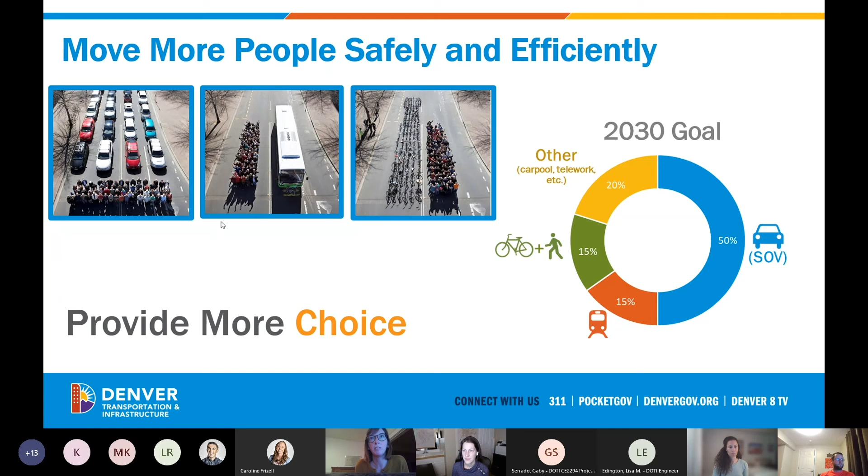On the next slide, we'll speak to these 2030 goals. Those are part of the Denver Mobility Action Plan. This plan really sets very strong goals in terms of what our mode share should be as we continue to move forward and think about how we can use space within the city's right-of-way more efficiently to continue to move people safely throughout the city. We'll also keep in mind sustainability and how we can continue in Denver to not only move people around the city, but do so in a more efficient and sustainable way.

One other aspect of the Mobility Action Plan is part of the Vision Zero cities. Denver is a Vision Zero city, which means that we aim to have zero traffic deaths by 2030. That goal is closely aligned with the mode share goal in terms of shifting choice and offering more mobility choice for folks, whether you want to walk, bike, or drive, regardless of how you're choosing to get around Denver. How can we offer more choices and make those choices safer as we continue to move forward as a city?

On the next slide, I wanted to talk through a bit more of that safety element. We're looking at how we can not only increase the mode shift of people walking and biking, but also decrease crashes and design out some of those opportunities for conflicts on our streets as we continue to improve multimodal safety throughout the city. Again, as a Vision Zero city, this is paramount to our work. It is part of the foundation of every project.

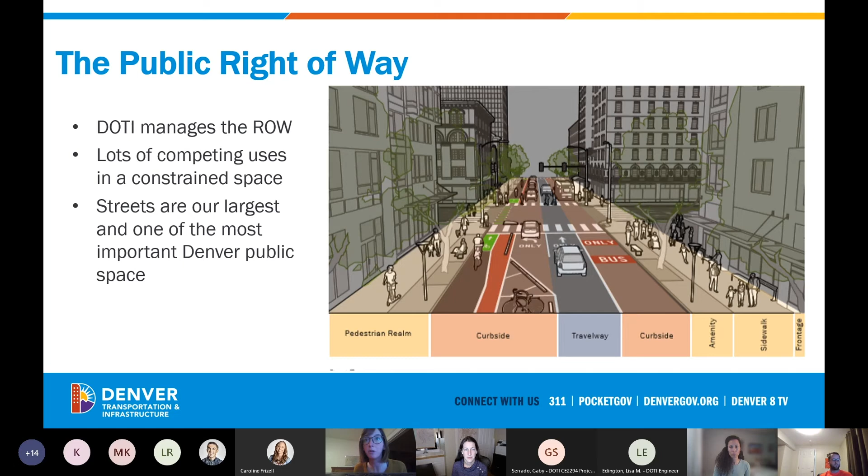As DOTI continues to create more multimodal choice within the city, we are constantly looking at this constrained resource that we have within our right-of-way and how we can continue to understand how we can parse that out, really delineate the space so that regardless of how you're using our right-of-way and how you're choosing to get around Denver, you feel safe and comfortable doing so. And with that, I will hand it off to Afwar to speak more about the University Neighborhood Safer Streets project.

All right, thanks, Ellen. That's a good overview and a good reminder as to why we're doing a lot of the work that we're doing. Thinking about that right-of-way too, I think the University Safer Streets is a good example of how we're going to try to manage that strategically, with our partners, and in a collaborative way. So let's dive into some of the projects at hand here briefly tonight.

There's a lot of plans that some of you are familiar with that have been identified to help identify the projects in the area. So some of these plans, Denver Moves Pedestrian and Trails, Denver Moves Transit, and the University Mobility Plan and Study - these plans are really community driven. We've gotten a lot of feedback from folks around what kind of actions we need to prioritize to strengthen connections and improve safety and the ability to get around the University and Colorado Station areas. So these plans have identified projects, but we need the funding to make them happen.

We have a couple funding opportunities available to us now: the CIP, which is the Capital Improvement Program, and the Elevate Denver bond program. With that funding, we're able to move some of these projects forward that have been identified through community and through these plans. This grouping of all the projects in this area will be labeled under University Neighborhood Safer Streets.

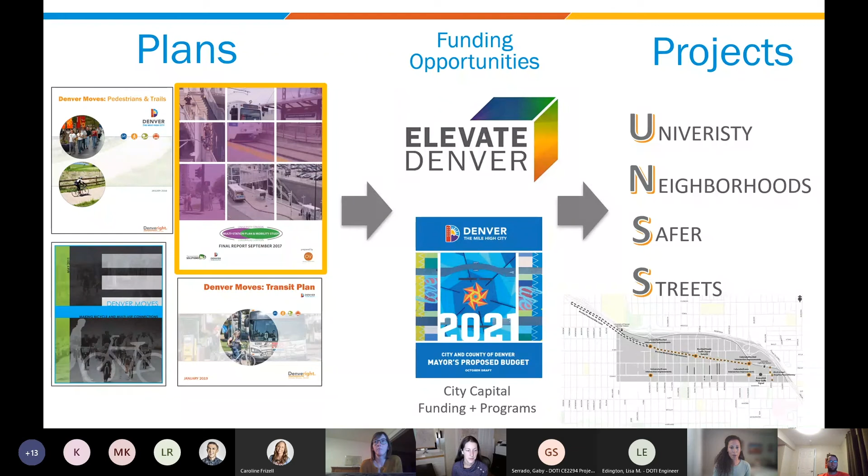These projects are identified for multimodal improvements in this area, which you can kind of see down here on this map. We'll go to the next slide and zoom in on that map to get a better sense of where we're at in this area.

As you can see here, this University Safer Streets area is bordered by I-25 on the north and east, Williams on the west, and Evans to the south. The projects we're looking at encompassing in this University Safer Streets area are identified to be implemented in the next 5 to 7 years.

That's a long time, but we've got some work coming up a little bit more immediately this spring, summer, and fall. That's really what we're looking to talk with you about tonight - that's what's driving this meeting and wanting to make sure we're getting out and talking with you about some of these more immediate projects.

If we go to the next slide, we can see that one of the projects here is the Buchtel bike improvement, which Ellen will be diving into a little bit later tonight. That's one of the projects really driving this conversation this evening, and we'll dive into that a little bit more.

Just real quick, on the next slide I wanted to highlight several of the intersection improvements. There's going to be some major intersection improvements in this area that I'm sure many of you are familiar with - they've been identified with community support. Those intersections, as you can see here, are Buchtel and University, Buchtel and Colorado, Evans and University, and Evans and Colorado.

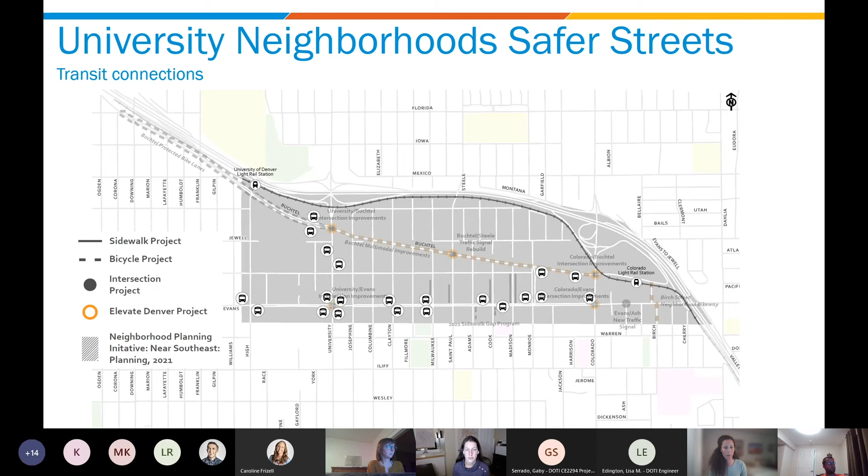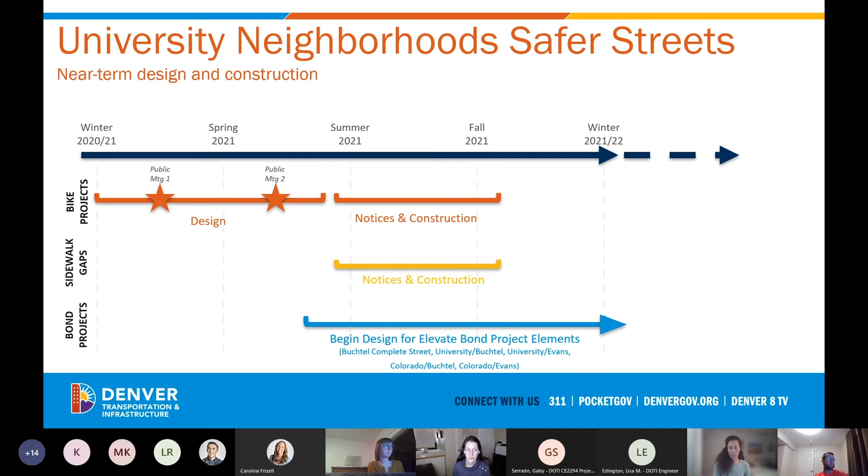I think maybe a schedule is up next, and then we'll dive into the Q&A break. Just a real brief highlight of what you can expect: we have the bike project, which Ellen will dive into after the break, with construction and implementation this summer to fall, and more opportunities for public input. Compare that to the sidewalk gaps, which will also be filled this summer and fall, and the design elements for the intersection improvements. That gives you a good idea of what to expect in this area in the immediate future. After this break, we'll kick it over to Ellen.

All right, so we have our first Q&A session here. We have at least a few questions in the chat so far, and I think the first one was from Nick, about the breadth or scope of this project, focusing on bike lanes. Ellen hasn't gotten into that discussion yet, but maybe you can do a quick description of which section we're talking about and why we're talking about it today.

Thanks, Alicia, and thanks, Nick, that's a great question. I know there's a lot of information we just threw at you, but it's worth noting the University Neighborhood Safer Streets Initiative is a collection of projects that are much more than just bikeways. Part of why we're having this meeting tonight is that there's a bikeway project as part of the city's paving coordination program. This is an effort on Denver's part to be more efficient with resources and to disrupt the streets with construction and improvements as little as possible. So we're looking at our repaving program within the city and identifying areas that are going to be repaved and are also identified as bikeway connections in Denver Moves Bicycles.

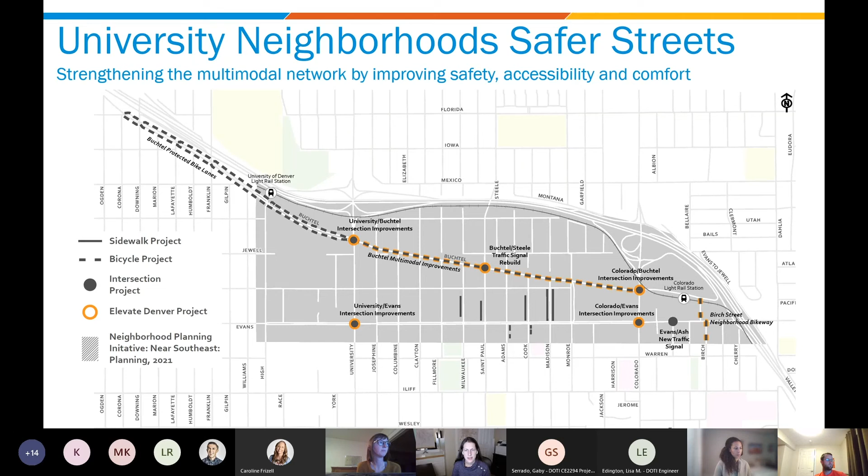I'm going to turn it over to Ellen here to talk about the western portion of the bike project. Great, thanks, Alicia.

As I just mentioned, this part of the meeting we're really going to focus in and drill down on the bikeway improvements proposed for Buchtel Boulevard from Corona Street to University Boulevard. This is part of our paving coordination program. On the next slide, we'll speak a little bit to how DOTI considers bikeway improvements as we continue to build out the network in our city.

In 2018, we did a statistically relevant survey of Denverites to understand comfort levels with the current infrastructure and bikeway network throughout the city. What we found from that survey is pretty interesting: only 16% of people feel confident or somewhat confident on the current infrastructure available to them and the current network connections available.

On the next slide, what we gleaned from this survey is that there's a large percentage of Denverites, 75% in total, that would potentially ride a bike in Denver much more often if they felt more comfortable doing so. So we are really looking at how we can continue to build out the network through our multiple implementation programs and opportunities to create a strong, connected network of safe, comfortable, easy connections for people who are choosing to ride their bicycle.

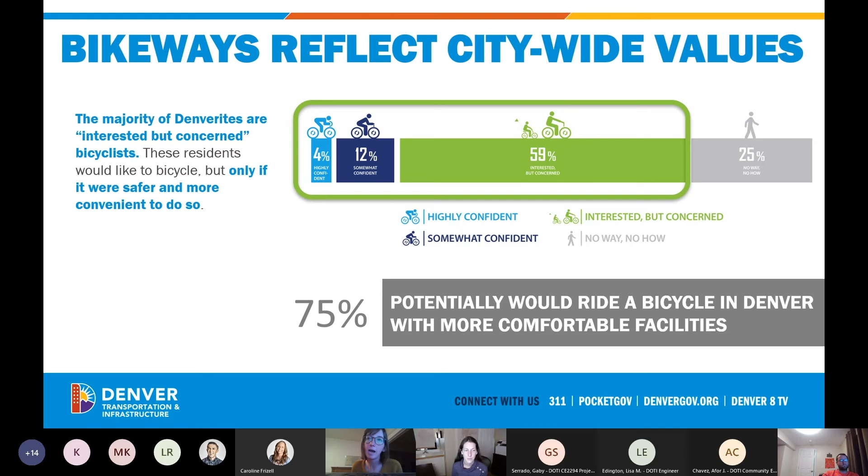The great thing about these improvements is that while safety of people riding bicycles is a top priority, there are also lots of benefits for people who are walking as well as people who are driving on those same streets. So these truly are multimodal improvements as we're building out a network of stronger connections for people who choose to bike.

Building on that, we are looking citywide at how we can increase the combined walk-bike mode share, as well as increase the amount of people who live within a quarter mile of a high comfort bikeway — that's within a 5-minute walk of a high comfort bikeway facility that can plug into a more connected network. From that, we're looking at how we can provide healthier, more affordable, and more sustainable transportation options citywide.

We have a goal over the next 5 years, through 2023, to build 125 new lane miles of bikeway facilities. This is an effort to quickly build that network so folks feel more comfortable and feel it is truly an option to get around for their daily needs in Denver.

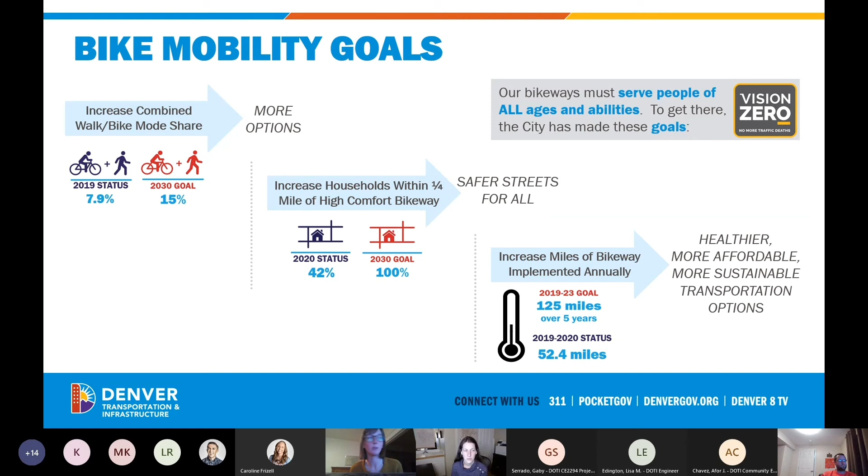As part of that, we're looking at how we can develop high comfort connections — bikeways that can serve people of all ages and abilities, and really align with that 'interested but concerned' group. So for folks with a lower comfort level overall, how can we design our streets to be more comfortable for people who are interested but maybe not currently biking on our streets?

One of the implementation programs we use to continue building a stronger, more connected network of multimodal and bikeway safety improvements is our repaving program. We partner with our operations team within DOTI to understand the repaving schedule across the city and align that with our planned network connections within Denver Moves Bikes. This represents a key opportunity to implement important connections while being mindful and efficient with our resources, so we're not continually out in the street or restriping something just repaved. It allows us to be more efficient while still making headway on our goal of stronger multimodal streets throughout the city.

Through this program, we aim each year to implement 10 or more miles of bikeways through the repaving program.

Now that we have a little bit of background about the history around the implementation program for this section of Buchtel Boulevard, let's dive in to talk about what this street looks like today, as well as what the planned improvements are through this program.

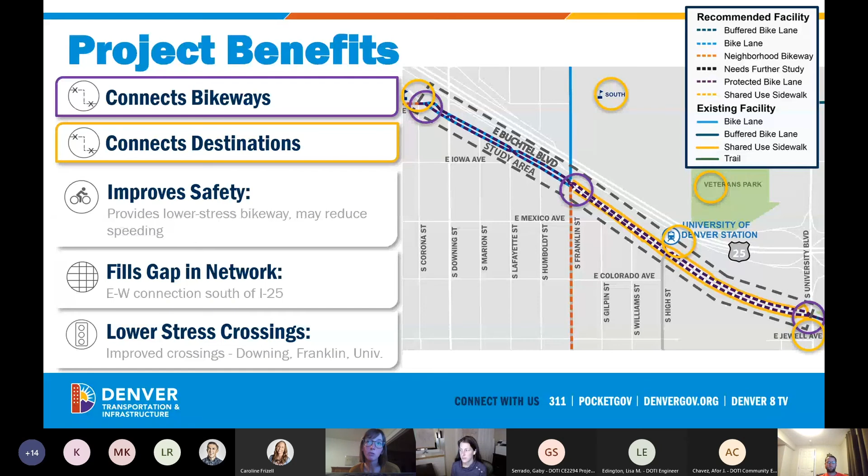Through the South Central Community Transportation Network, those bikeways on South Franklin and East Florida are moving forward. It also fills a gap in the network, providing a strong east-west connection south of I-25 that currently does not have a high comfort connection. We're also looking at how we can make crossings along Buchtel lower stress through this project, with a specific eye to Downing, Franklin, and University.

On this slide, we are looking at the existing conditions of East Buchtel from Corona to Franklin Street. As many of you are familiar with this area, the width and characteristics of the road change as you move along it. For those on the phone who can't see the slides, I'm going to briefly describe the existing conditions for different sections of Buchtel Boulevard.

This is the westernmost extent of the paving coordination project, from Corona to Franklin. There is an existing bike lane, but only from Franklin to Downing Street, so there's not a continuous connection between the existing bikeways and the proposed bikeways. There's currently no buffer or protection of this bike lane between the travel lanes on Buchtel Boulevard.

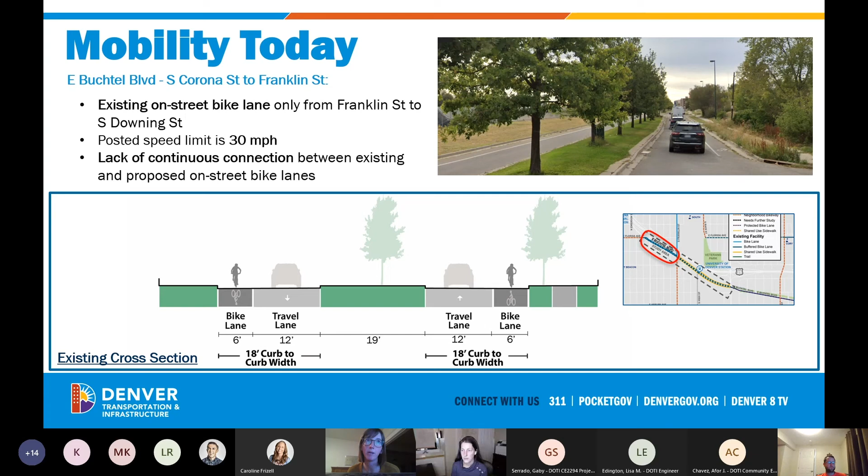Moving a bit further east, this is Buchtel Boulevard from Franklin to High Street. Currently there is no bike facility in this section, and there are very wide travel lanes, 18 to 19 feet in some cases. For context, typical travel lanes vary between 10 and 12 feet, so these are very wide lanes, and that can sometimes encourage high speeds, which can further discourage people from biking, especially since there is no bikeway in this section.

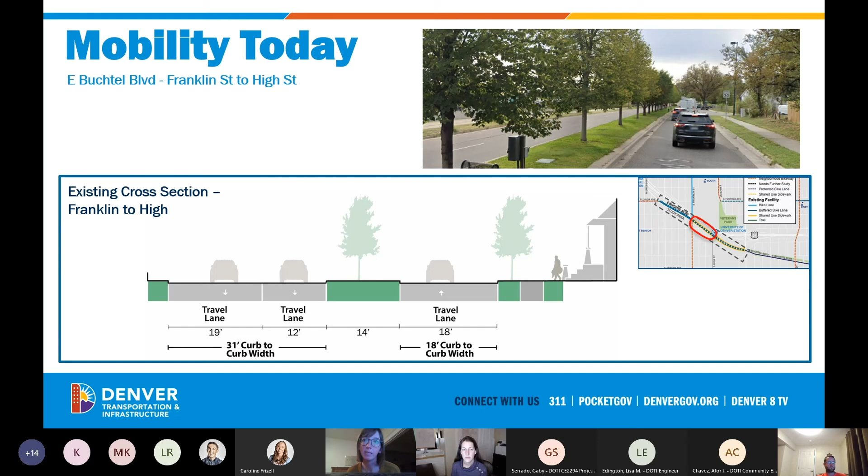On the next slide, we'll talk about the easternmost extent of this project: East Buchtel Boulevard from High Street to University Boulevard. This is the section of Buchtel that fronts DU. Currently there is a parking lane and 2 travel lanes in each direction, same width of the street, but this is more of the normal width of travel lanes, an 11-foot and a 12-foot travel lane in each direction with parking on either side of the street.

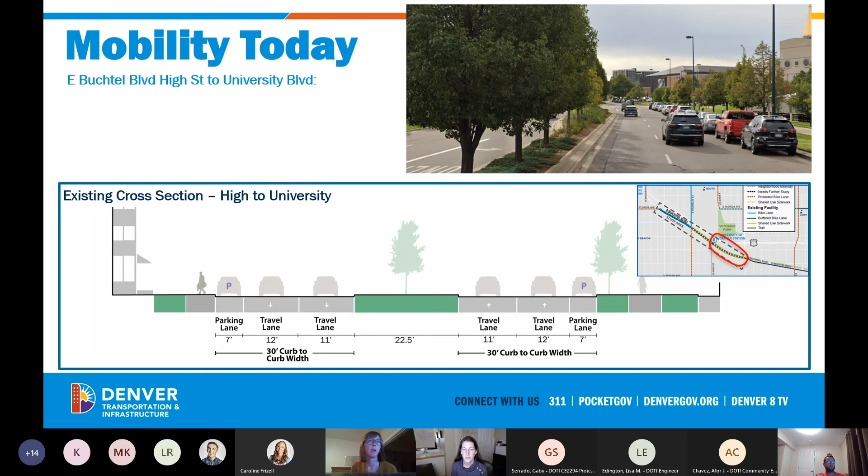Now let's talk about some more existing conditions, specifically what the crash picture looks like along the street. As I mentioned earlier, a goal of the paving coordination program is to build out a stronger, more connected network of bicycle-friendly and bicycle priority streets throughout Denver. But we're also constantly looking at safety and how we can improve safety through all of our projects and multimodal improvements. Crash data is something we look at for all projects.

If you're able to see the presentation tonight, you'll notice 2 orange dots on a picture at Buchtel and High and at Buchtel and University. This is where we've noted crashes that have involved somebody on a bicycle or someone walking. There have been 6 total of those types of crashes, looking at data from 2015 through 2020, the past 5 years. But there have been 108 crashes in total along the corridor, with 2 serious injury crashes and 1 pedestrian seriously injured along this stretch of roadway.

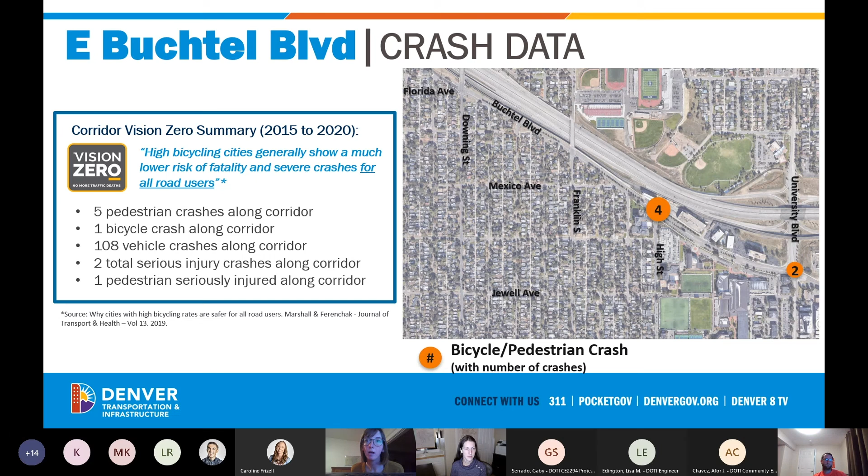We take this into account, and later in the presentation we'll talk about the proposed improvements. We really look at intersections and locations along the corridor where there have been crashes and conflicts, and how we can potentially better design the street to design out some of that error and make it safer for everyone using the road.

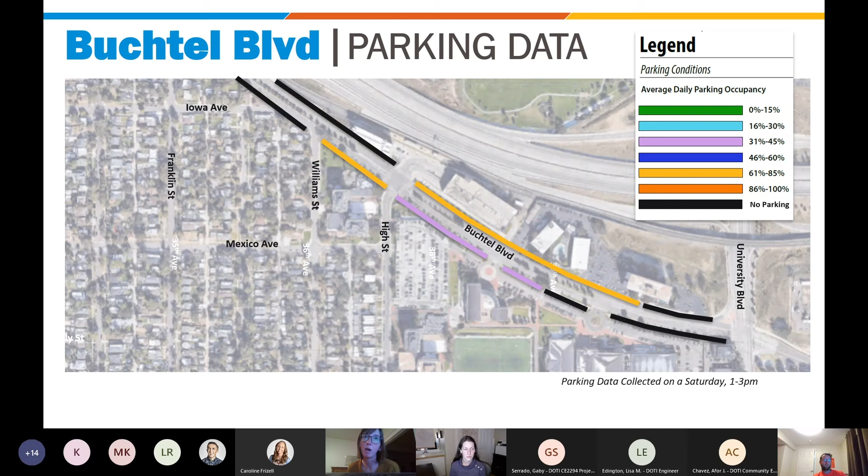On the next slide, we'll also talk about some other existing condition data, looking at parking data. We did collect information about the utilization of parking along this street where it exists. As we noted before, there are stretches of this road that currently do not have parking. Worth noting, through our proposed improvements, we do not anticipate full repurposement or full removal of parking. There might be some slight exceptions at intersections to improve visibility, but primarily throughout this corridor we will be maintaining parking where it currently exists on Buchtel.

For a final existing conditions report, one other data point we pay attention to as we design these improvements is speed of vehicles as well as volume of vehicles. So we did traffic volume and speed counts along this section of Buchtel. West of Franklin, we're looking at about 7,700 trips per day on average. East of Franklin, between Franklin and University, that's a little bit higher, looking at 12,000 and change of average daily trips. And speeds are pretty high. The posted speed limit is 30 miles per hour, but the 85th percentile speed, which is an industry standard for understanding what that average speed truly is on the roadway, ranges from 34 to 38 miles per hour.

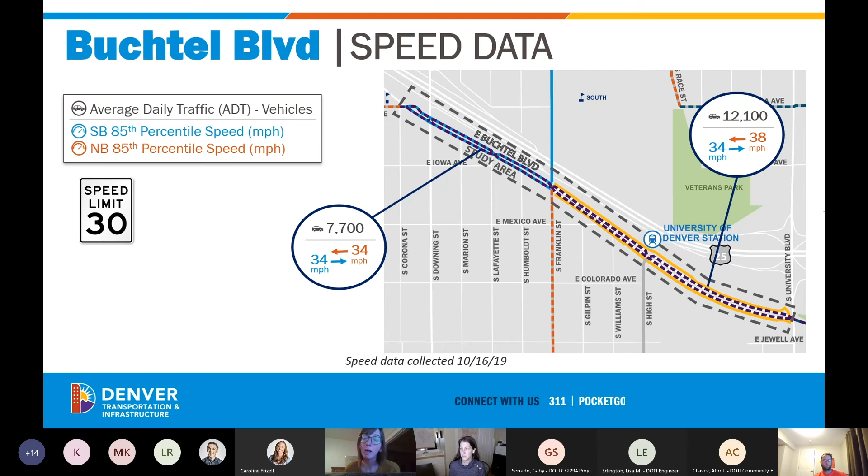I wanted to call this out because in our next slide we'll speak to what our improvements are. We look at the speed and volume data to help determine what will truly be the facility that is the highest comfort for folks in Denver choosing to ride their bicycle. Given the speeds as well as volumes of traffic, we are proposing a mixture of buffered and protected bike lane along this stretch of East Buchtel Boulevard. That means there will be a buffer space between a separated space for cyclists and separated travel lanes for people driving a car. Sometimes there will be protective elements within that buffer, like vertical bollards that further define that space and separate it between those two uses. So we're still in early concept design determining what those improvements will be.

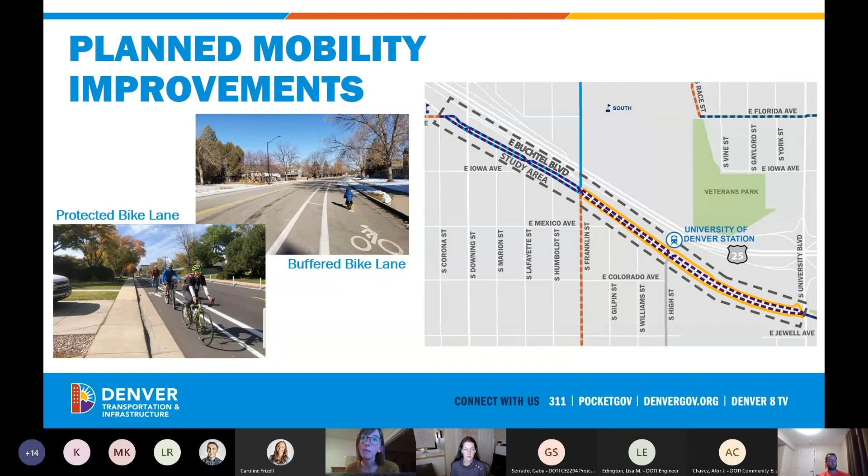Alicia mentioned earlier we do have a survey open, and we'll have time at the end of this meeting if you'd like to fill that out during the meeting or afterwards. In that survey, we're really diving deep on what we think some potential changes could be and wanting to get community feedback to understand if we're on the right track and how that would play into the final designs. Overall, we are looking at a combination of buffered bike lanes and protected bike lanes to be that high comfort connection on this area of Buchtel Boulevard.

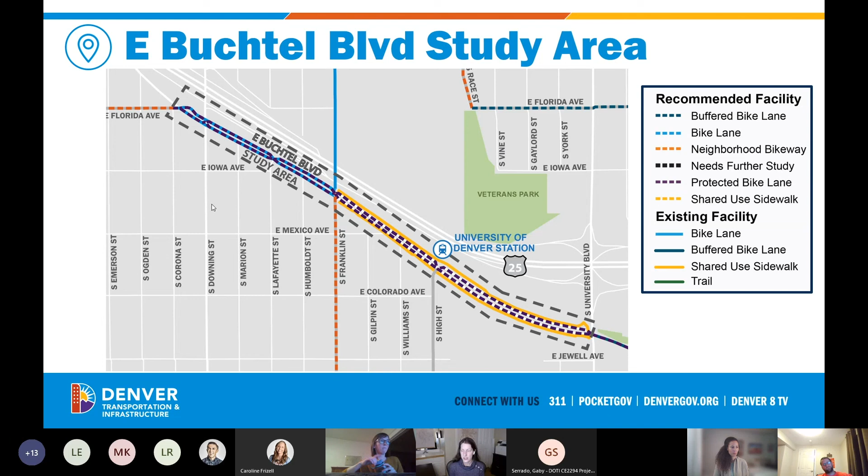So thank you for all the questions. I think we're out of time for questions for now. Here, as I scroll through, here we go.